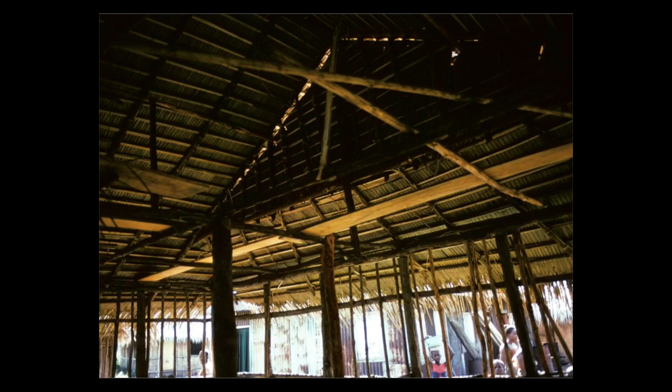This is a completely different example of architecture responding to its environment. This is along the Gold Coast in Ghana. Here you see suddenly we're in the rainforest, and instead of thick mud walls and courtyards, it has now given way to a large roof made out of palm fronds. It's all about cross ventilation, and the society responds with a very open, activities are expressed and exposed to the street, as you can see here.

So there are several points that I want to make about this philosophy that we've developed called multicultural modernism, and I'm trying to show you the roots and the evolution of that philosophy. One of them is celebrating people and place.

Well, this is Thorn Crown Chapel by Fay Jones. It's in Arkansas, fairly close to Fayetteville. I spoke last night in Fayetteville at the School of Architecture, but the day before had the extra treat of getting to see this chapel as well as the Mildred Cooper Chapel that Fay Jones did, also not so far from this chapel. And these are incredibly beautiful expressions that not only are they tectonically honest and delicate and forceful and powerful, but they harmonize into the landscape, they grow up out of the ground, they have a sense of place. And at the same time, there's even a sense of allusion to history.

This is kind of a reverse concept of a Gothic arch. Instead of the flying buttress, all of the supports come from within. So I think that this creating poetry, but within a context and for the people that it's for, is a very important topic. So I want to show you a series of projects that I think support that idea.

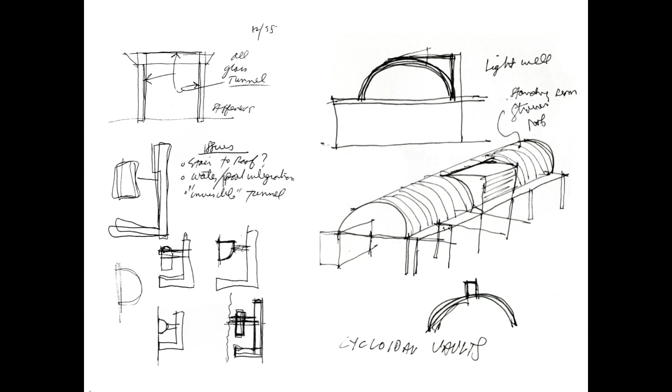And here you see some of the materials. We did cast-in-place concrete, stainless steel. One of the interesting things about Richard Neutra is that he used to design houses that looked as if they were built in steel, but in fact they were built out of wood. So because we had a bigger budget probably than when he started, we were able to do the pavilion in mostly steel with some concrete.

We restored the house. So this is an interesting conversation about preservation as well. It's a form of preservation, but it's really also an adaptive reuse to make the preservation work today for these clients. But you have to also appreciate that had they not bought the lot and expanded their house, there would have been a very large two or three-story McMansion that would have really overwhelmed the original house. So we think it's a form of preservation.

You can also see that we wanted to honor the spirit of Neutra, but yet proclaim our own individuality and creativity 60 years later.

Here's a semicircle - this is a cycloidal arch. So we are responding in section, not unlike what we found in the Neutra house and plan. However, this cycloidal arch is the same arch that Louis Kahn used on the Kimbell Art Museum.

It's an ancient Roman formula, and it's a flattened arch. You can see we more or less just kissed the original house with a glass corridor connecting the two, and that was another way of honoring the house, if you will.

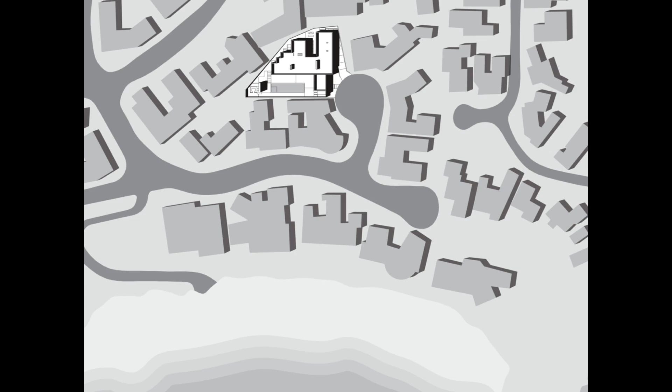One of the ways that we unlocked the potential of the site is that you're able to drive down a ramp, and underneath the main floor are garage, gymnasium, storage, mechanical rooms, sauna, different secondary support. And that freed up the entire ground plane for the house.

Mind you, again, 11-foot height limit, and very much interested in how do we evaporate the barrier between indoors and out, which is part and parcel to the possibilities of living in Southern California.

So if you look here, there's no glass. This is completely open. I'm trying to remember how wide that is - it's about 60 feet. And we have a series of doors that pocket into the wall.

It opens up completely, so the house can transform itself from a cozy house on a cold night to an open-air pavilion on a beautiful day, of which there are many.

There are also some interesting things we're doing with materials. This happens to be Rheinzink, which is a naturally weathering steel - it has zinc in it, so it's not pure steel. Here you see looking in the opposite direction, celebrating the horizontal line, almost as if capturing inspiration from a Japanese landscape.

This is a courtyard that is on the east side of the main living space, the ocean beyond. Because there are coastal breezes, we can actually be outside and block wind with doors that can open and close when one desires to do that.

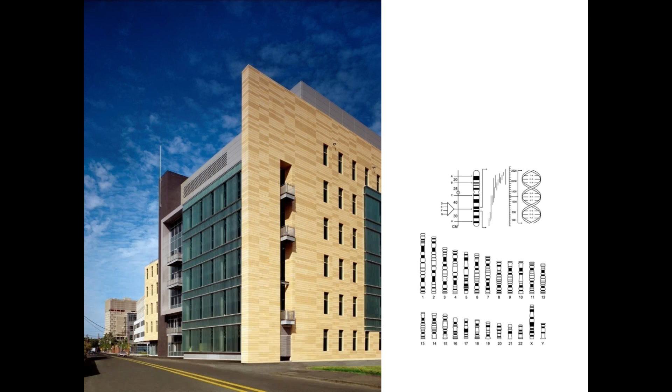We're always interested in understanding how the culture of what's happening within a building can express itself on the exterior skin. So we did our own little study of DNA and found that there are four sequencing gels that compose a DNA molecule. We took four different textures of the same clay, colored terracotta, and composed our own DNA. It's a little bit of an inside story that not everybody knows, but the scientists are aware of it, and it's part and parcel to how this skin design developed.

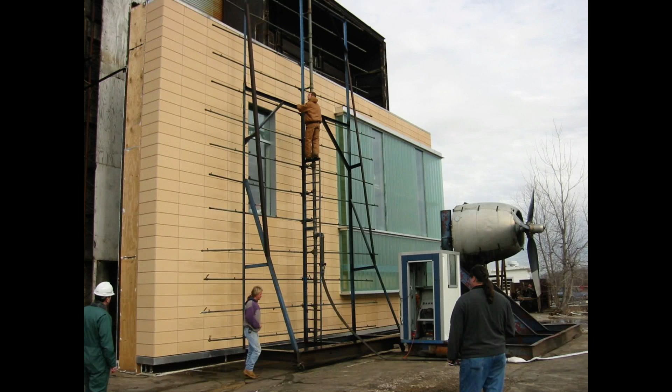This, by the way, is our test. We had in our specs that there had to be a full test. We hired the company Heitmann, a curtain wall consultant, and they have a testing facility outside of St. Louis, not that far from here, actually. They create wind with a DC-3.

And actually the glass kept leaking. So we had to fly to Boston to meet our very irate client because it was a fast-track project and the project was being built at the same time that the channel glass was failing its water test. To make a long story short, we were read the Riot Act. We brought in the German engineers, and they were able to resolve it. It was just a subcontractor installation issue.

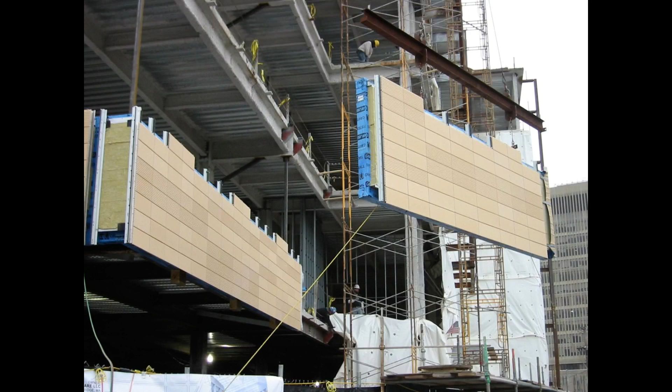But sometimes you just cannot be smart enough to have some of those tests done before all the glass had been put up. That would have been a disaster. So here you see the panelized terracotta system being installed. These are all prefab panels made in the shop and then hoisted up. Here you see it in process, and then we infill the extra terracotta pieces.

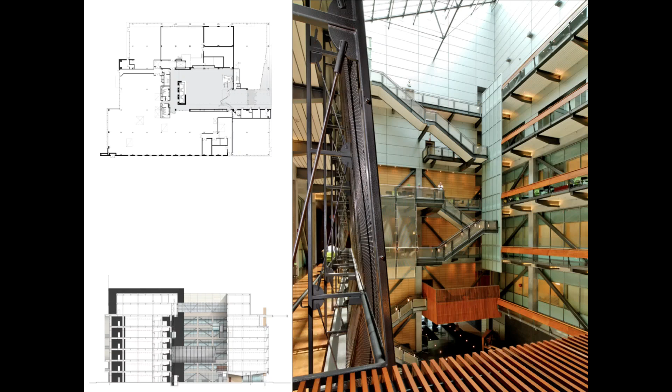Inside, this is a fairly large footprint, so we wanted to bring light through the center of the core of this building with this light-filled skylight. You can see the skylight there, the atrium. One of the things we were very interested in is trying to connect people vertically as well as horizontally, since there are different researchers doing different kinds of things in their laboratories.

So by these large extended platforms, we created what I like to call living rooms in the sky, and we would always put the living rooms in the sky right next to the coffee bar, just within the shell of the atrium. These places become places of gathering and connectivity, and some of the platforms have foosball machines, flexible furniture, so they're quite effective.

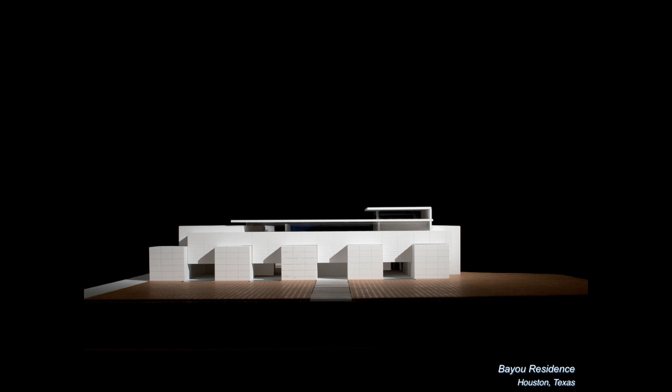This is the Bayou Residence, a house that we designed in Houston, Texas. Unfortunately, it never went to completion because our clients got divorced, so that was sad. That does happen. Sometimes not everything gets built.

But they were art collectors, and they had a significant collection of Donald Judd. I don't know if you know that artist — he's a fantastic artist who had very cubic, beautiful, pure sculptural elements. That in turn influenced the design of this house.

These five cubes were going to be clad in Texas limestone. We made a trip to Marfa, Texas, where Donald Judd has an amazing place called the Chinati Foundation, where you can see some of his large-scale pieces, which greatly influenced the design of this house. You can also see some of the original sketches that emanated and started the design process off.

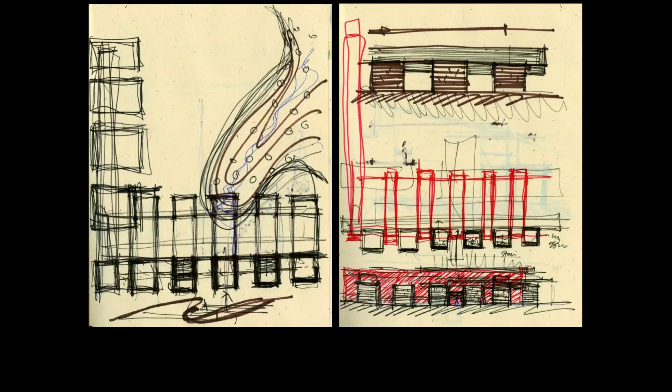I might add that this site cascades downhill to the bayou. You get a sense of it — the bayou would probably be right about there, the water of the bayou. But alas, it never happened.

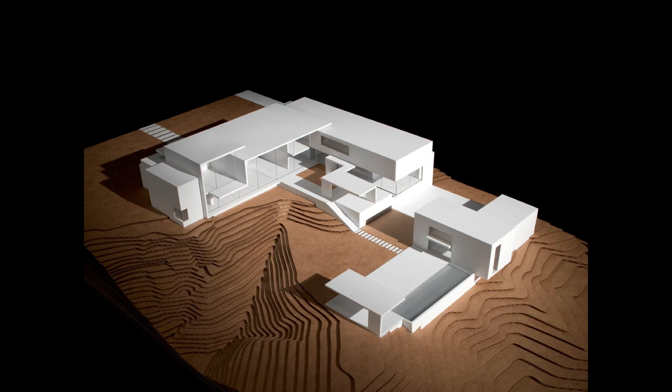My wife and I went over there for dinner, and our friend said, oh by the way, this house, which was completely boarded up and derelict for years, is going on sale for probate tomorrow. And we bought it, because we were afraid some developers would have just knocked it down, since the price we paid was really just the price of the land. But I knew what we had there.

It was a Rudolf Schindler house, an incredibly important architect, and I hope students who come to LA will get to see, if not this house, the original Schindler house on Kings Road. But anyway, getting back to the main point.

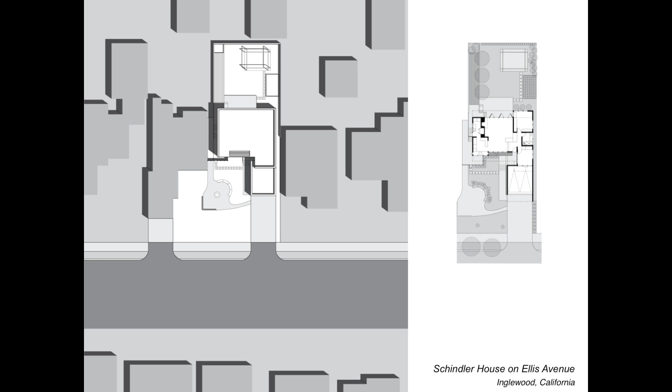One of the things we did was create a communal garden and a communal gathering place for the entire street. Here you see it—this is Callie and Rich's house, my daughter and son-in-law, who bought this house from me. So this is the house that we renovated, and here you get a sense of that communal yard.

We built a communal fence area for recycling and some of the programmatic service items necessary to pull it off. This was our communal endeavor, a communal garden project, in fact. And here you see the rescue mission we undertook.

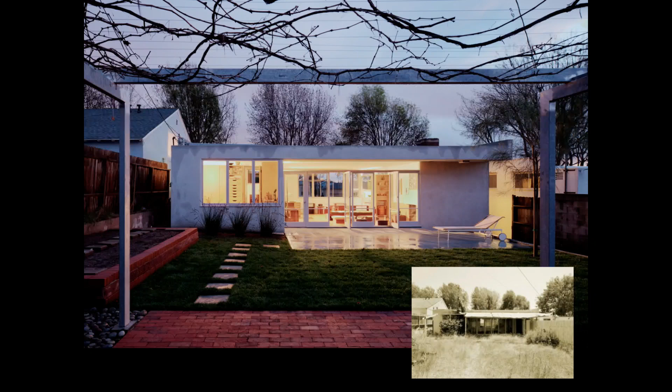This was the original photo. The place was literally falling down, and this is what we were able to restore it to.

One of the really good things was that all the original windows and doors were there. The kitchen was a disaster, the bathroom was a disaster. Since it was for a young family to raise their kid, we felt we should be open to adaptively reusing it, but not changing any of the pure spatial constructs.

So this very modest house, 980 square feet, made me fall in love with Rudolf Schindler all over again, who in 1922 designed his own house on Kings Road. Because I worked on this project so intensely and read several books about Schindler, I believe his 1922 Kings Road house was the big bang of modern architecture, and I'm happy to argue that with anyone who'd like to.

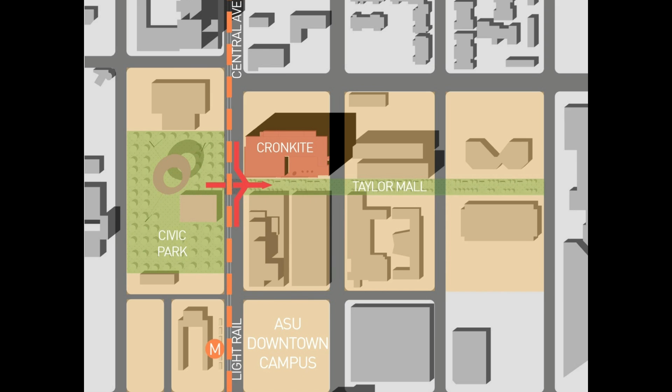We also delivered this project using the design-build methodology, and we were able to deliver it in 22 months from the beginning of programming to occupancy—about as long as it takes to do a bathroom remodel in LA. So we're very proud of that timeline.

It was also done on a very tight budget through the design-build methodology. We wanted to clad this element in Cor-Ten steel, but it wasn't in the budget, so we chose 3 colors of painted steel instead, with the colors coming from the local mountains, and the patterning influenced by the TV and radio spectrum.

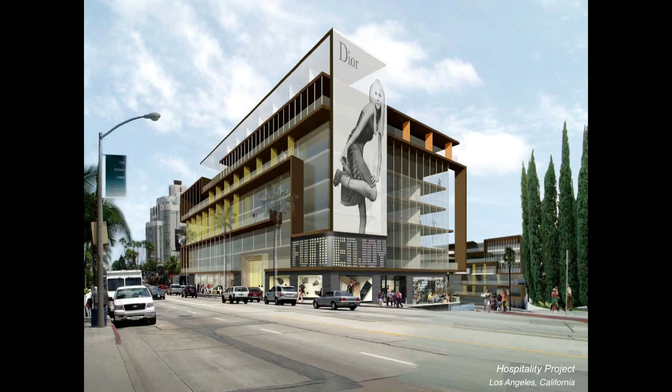This is the hotel, and you're allowed to do digital signage on this strip of Sunset. So this is all a digital sign that also will be, even though the rendering doesn't quite show it, the edge of this banding, this fluid banding, will also be LED lighting and part of the whole signage. And so in a way, we're trying to become part of this very vibrant community.

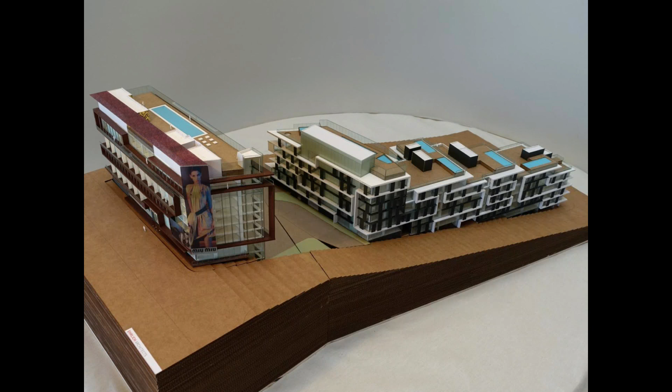And here the hotel, there's, on the scale of the community of the hotel audience, a communal roof terrace. And there will be 40 condominiums in this building, and it's a shared plaza or courtyard that will be a very important hangout place, and we're going to have cafe activity that spills out onto the piazza.

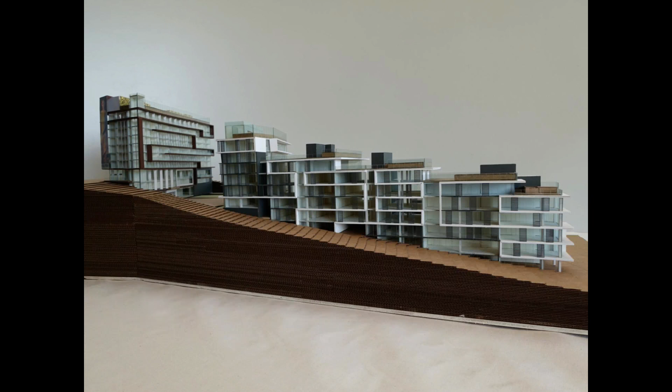And you get a sense of how we're trying to create these communal outdoor terraces. We've also, and this was a city requirement, we talked about this in class today, how because the city requires it, and I think it's a great requirement, that we have to build a certain number of affordable units as well.

So courtyards for living, another topic that is one of the components of multicultural modernism. I go back to Marrakesh. The courtyard on the scale of this city is the Place Jemaa el-Fnaa. And each of these private courtyards are only two stories tall.

So here you see the American dream turned into a nightmare, right? The density of LA is increasing, land is more and more expensive, and everybody still has the dream of plopping down their house in the middle of their piece of land. Well, we're learning now as LA is densifying and as mass transit is coming in, we're realizing that this paradigm just doesn't work.

Every piece of public space is asphalt. You look out your window, five feet away is your neighbor. And then take a look at Marrakesh, Morocco. So why not reverse the field, right? Why stick to these old paradigms of thinking? And let's take suburbia and look at it as a way of creating density with courtyards.

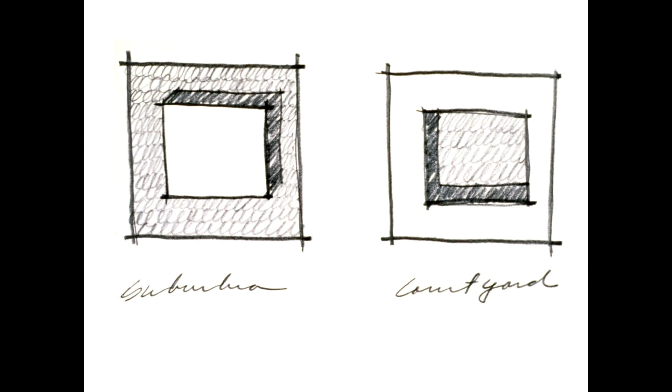Another influence that reinforced this idea was that I spent some time in Japan doing a project in the late 80s, and I noticed that many of their ryokans and important buildings would have courtyards, and also how even within the enclosure, there would be almost like a special meditation spot to a Tokonoma Tansu area.

So creating community is important in the work we're doing, and this is the School of Earth and Space Exploration on the main Tempe campus at Arizona State University.

One of the things also I'm a firm believer in is listening to the land. Well, what does that mean? Well, every sun exposure is different. Western sun is completely different than northern sun.

So this is our north facade. Notice that it's mostly glass. This is our western facade, and we have a double skin protecting the glass. I'm a big believer in clarity.

These channel glass vertical elements are stairs. The shear walls that actually give it the lateral stability are all expressed in concrete. It's a very simple diagram. There's an L-shaped partie of laboratories. In each corner are large shafts and vertical circulation. There's the core of the building, elevators, restrooms, etc.

The mixing bowl, where we really create community, you'll see it in a moment. And then these are offices bringing in north and west light, and there's lots of glass bringing in light from edges all the way through.

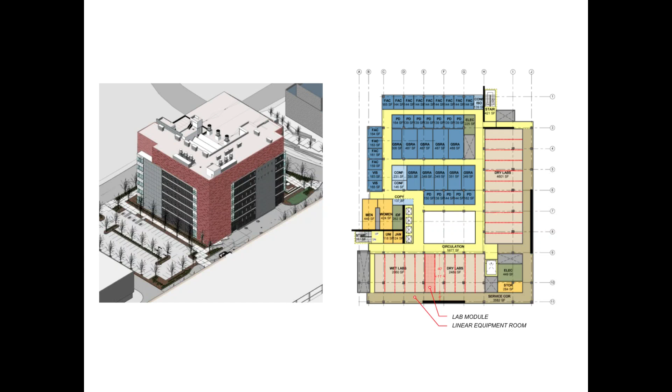This is looking from a laboratory component back from that angle. And so we clad all the vertical shafts in brick, including the penthouse, for the clarity of that. Here you see the shear wall. We did match the same color of brick, but we actually pulled the brick out and created some very interesting patterning.

That was more consistent with some of the design ideas we had. Notice the sunscreen on the west. Here's the north facade. You start to see that clarity of the diagram, shear wall, vertical circulation. That's the entrance, by the way.

And again, the western facade, that brick element at the base is the planetarium. You'll see more about that in a moment. And you walk by the planetarium to enter into the building, and then you're in the main lobby of the building, which the first 2 floors of this structure are actually public, and it's an educational outreach to students of all ages, even including K through 12.

The planetarium, which is behind this wall, is this structure here. And it's very interesting, the technology, because you put on 3D glasses and it's as if you're in a domed auditorium. The technology is marvelous.

So here's the cross-section that is significant for you to just appreciate. The first 2 floors being the public component, and then at the 3rd floor, notice there's a floor over this atrium, and then there's a 5-story skylit atrium, and from this floor up is all privatized research.

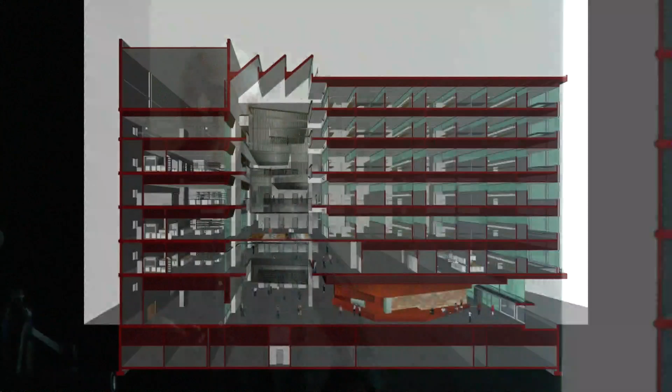They're studying, they have a live feed to the Mars rover. So there's a lot of Earth and space exploration going on. And so here we see the 3rd floor rising up. You see the elevator bank on the far wall.

When you look down, this is our crater carpet. We asked the 5 top scientists to give us a photo of their favorite crater, and we made our crater carpet with their craters and composed this composition, which just becomes fun and people enjoy it.

But importantly, we're taking all the labs and we're opening them up. So the brick, remember the brick that wraps the laboratory component, the L-shaped partie? Well, that wrap continues on the inside of the atrium. This becomes the main gathering place, creating community at the scale of this building and the research that's going on, and then paying special attention to allow the indoor activity of the lab to extend out into the atrium.

And then just some of the details, laser cut stainless steel. This patterning was taken from the United States geological patterns that exist, that are all published and capable of being taken and used.

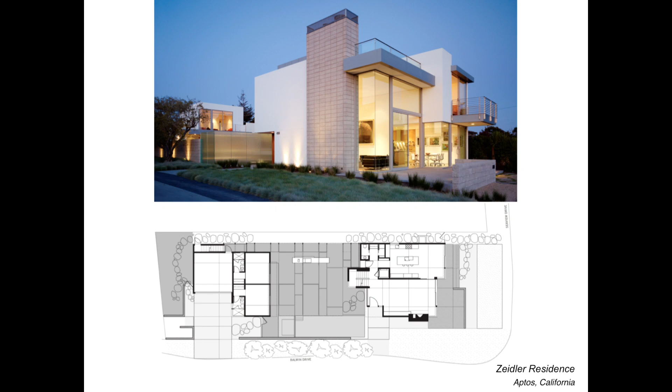Here's a house that expresses courtyards. This house has been pulled apart. There's a courtyard in the middle. And here you see the courtyard from a distance, and that courtyard also has extension of indoor and outdoor space. This is now looking back at the guest house.

This happens to be not in a very dense area, but we are doing some houses in Venice on tight sites, embracing the courtyard concept. You'll see that at the very end. The rooftop—we're generating activity up here by supporting it with a fireplace and an outdoor kitchen.

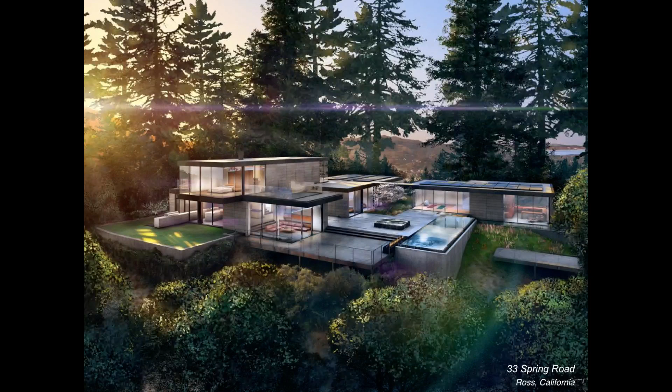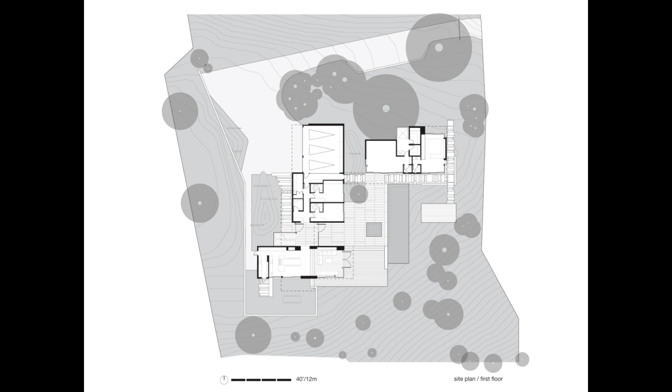This is a house still under construction in Marin County, in the town of Ross. This is a rendering, as you can see, but there's a series of outdoor courtyards that are defined, which you'll get to see, and you can see that more in plan. This is a defined courtyard, but with a beautiful view, which you'll see in a minute. Resonating to the place is important.

So we actually used terracotta—this is terracotta clay, baked clay, big panels 5 feet wide. But notice the resonance with the redwood tree bark—it's a beautiful resonance of color and materiality. Again, it's still under construction. We're doing some detailing where this is the facade. Look at the infinity edge on all sides—there's a tube of water on all four sides.

And a house that we're just beginning now—more than just beginning, we're going to start construction in a couple of months. At first I thought this drawing was really hard to read, but in a way that might be good, because it really shows how indoor space fuses with outdoor space, which is part of the design. So this is enclosed space, courtyard—it's really a series of interlocking courtyards, and the negative space is as important as the positive space, meaning the defined outdoor rooms are just as important as the indoor rooms.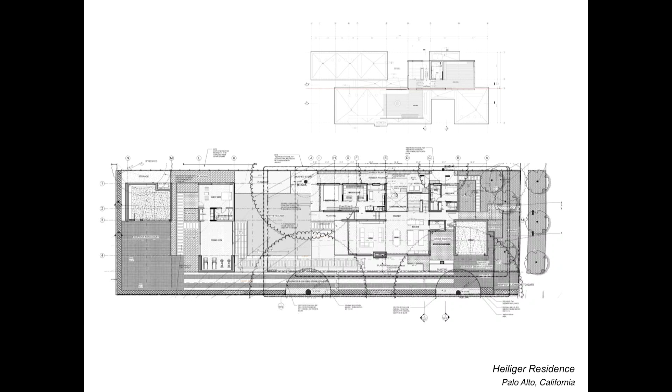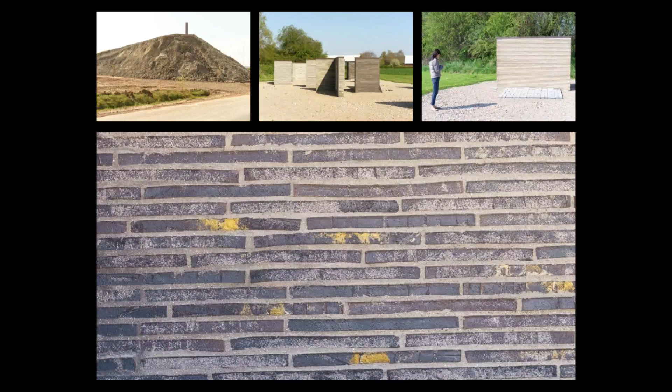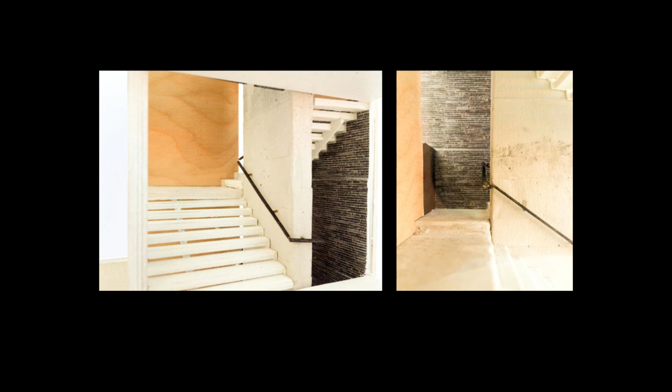This house is a lot about materiality and craft. We're going to use these beautiful handmade and fired brick, and we're going to bring the brick inside in certain areas, with a very minimalist palette. These are just some sketches for the master bathroom.

This is an aerial view of Pomona College, about 50 miles east of Los Angeles. It's a venerable old institution with classical Mediterranean architecture—you can see all the tile roofs of the original campus. We were asked to design two buildings for student housing, this complex and this complex, but notice how, from an aerial point of view, it looks completely different than the red tile roofs.

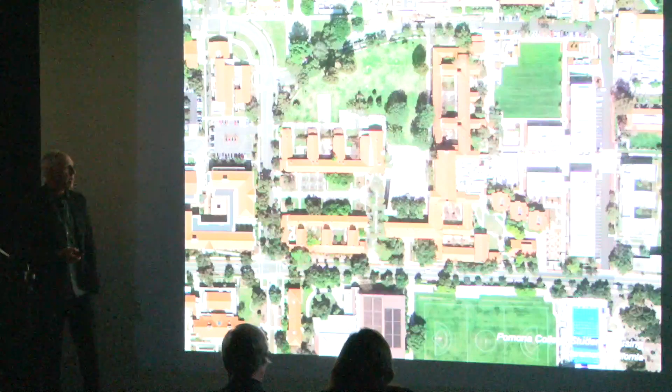It was an interesting conversation because the board of trustees were more conservative and really felt the architecture should be traditional and look like that, yet the students were developing a green agenda—students are ahead of the curve, right? So there was a green agenda being developed in part by student participation, and we were caught in the middle, if you will. We had to make three presentations to the Board of Trustees, and in the end we convinced them this building was more about the future than the past, and we are now harvesting a great deal of energy for solar hot water and electricity for this project.

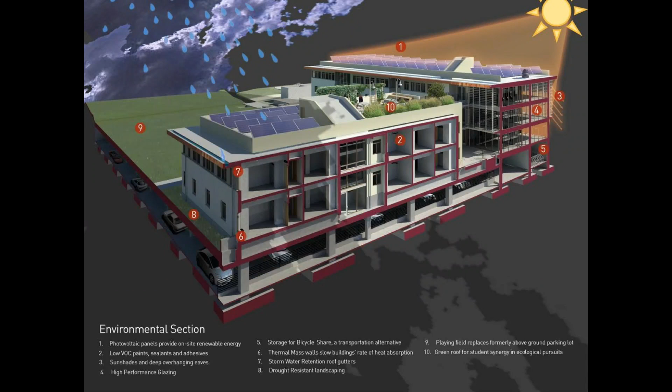However, we did want to still resonate and be respectful of the original architecture. We took terracotta rainscreen for sunscreen, and there was that tie-in. We used precast concrete, insulated precast concrete panels for our walls, which helped with thermal mass. And I didn't mention earlier, it's built over a parking structure, including the field, which is over the parking.

One part of the dorms is only two stories, this one is three stories—notice how we are doing, well, let me use the next photograph. We actually created a new classroom for the college focused on sustainability, and they added that as a new curriculum topic for the school based on this, which has been really exciting. So we added a dashboard with metrics—students can plug their computers in and watch electricity being generated. And again, you see the dialogue of the old and the new.

We were very careful to—there were six bedrooms to a communal suite, and this is one of the bedrooms. All had operable windows and ventilation fans. And even though this is in a very hot climate—because it's only about 50 miles from the ocean—we were able to...

If that group of six students has the air conditioning on and one of them opens a window, it automatically shuts down. But what's really cool is that because the students can all see how much each suite of six is consuming for energy, they compare notes and try to be the most sustainable group of six that they can be—it's kind of great.

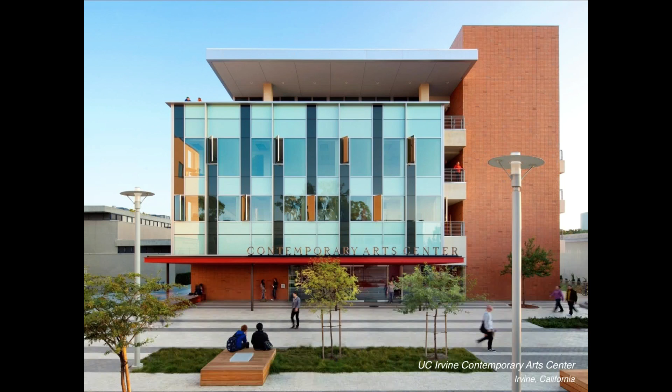This project is at the University of California in Irvine, the Contemporary Arts Center. This project was won in a design-build competition, and it's also an interesting study in sustainability, and let me try to explain.

There are two large spaces, a two-story gallery and a two-story experimental theater. These spaces are highly air-conditioned, with lots of lighting demand, people, etc.

But all of the perimeter spaces surround these two large volumes in the core of the building. This slide shows you how this had to fit very tightly into the existing arts campus.

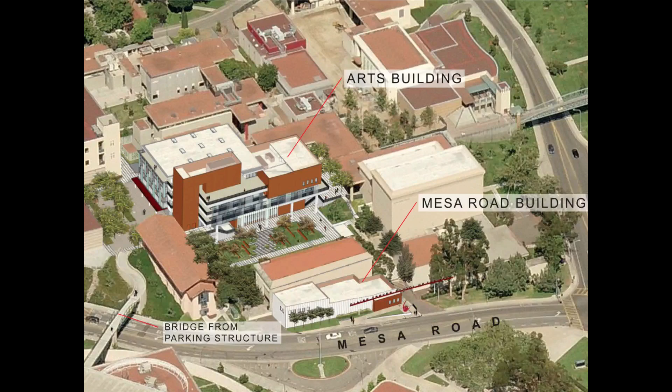Our strategy was that all of the perimeter spaces would be naturally ventilated, and in order to do that, we had to look at each facade quite differently. Here's the western facade, obviously the most complicated and challenging from a solar point of view. So we have these metal fins blocking the sun from the west.

We create a corridor, and then these spaces have windows that can open. So you might ask, well, how does that work? We have a series of ducts that allow the breeze to come in and be ventilated through the roof, so every room does have natural ventilation surrounding the perimeter of these two large volumes. We specifically did not put air conditioning in all the perimeter spaces.

We did a little education along the way, where faculty and students are made aware that on certain really hot days, they will not have a 72-degree room, they'll have probably a 76-degree room, but it doesn't happen that often, and we're taking advantage of the coastal breezes.

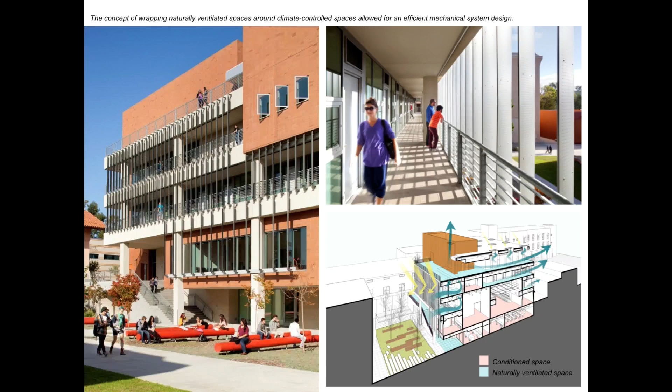We used old telephone poles stained orange for our telephone pole courtyard, if you will, a great gathering place - another example of sensible sustainability, if you will.

This was another design-build competition for the GSA, the General Services Administration. It's a United States federal courthouse in Yuma, Arizona.

This canopy was a great offering to the community, and it's because it's very close to downtown. You go over this set of bridges, and there's a wonderful series of walls and benches that people can sit on, and it has become a great gathering place.

People sit there because they're protected from the sun, and this canopy has photovoltaic panels producing 21% of the building's electricity. There are a lot of security demands of a building type like this, too much to go into, other than to say we have to actually protect the building from car bombs or truck bombs.

So all of these walls, which just look like friendly landscape walls, are in fact also part of the security. We really spent a lot of time and energy trying to integrate those very demanding, basically programmed requirements.

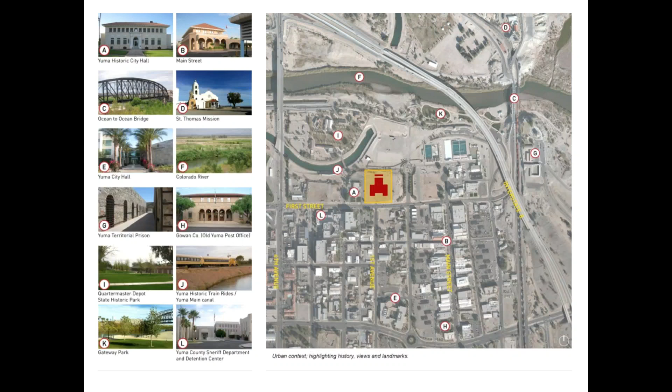So we looked at the Supreme Court in Washington, D.C., and how that heroic, very important historic building influenced our modest little structure, which is now a reinterpretation of a classic courthouse, but using materials of the native Arizona desert, the sandstone and rusted steel.

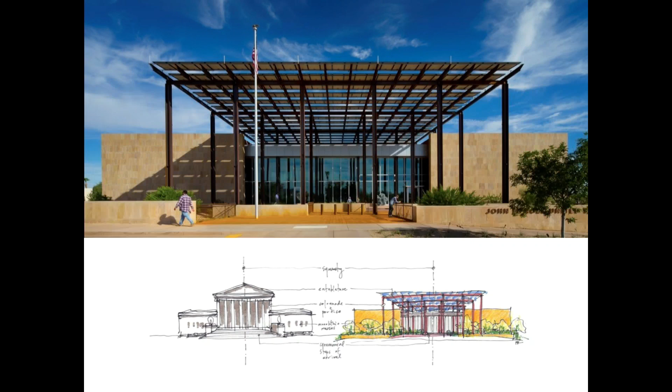The east and west facades - we have this rusted steel mesh, and we're growing grapevines up it. This photo was taken about a year ago; the vines have grown almost all the way to the top. That was our very modest way of protecting the windows on the east and the west from this very intensive sun.

From our historical research, we did look at verandas and porches and looked at how you modulate the sun in an intense desert environment. We also, influenced by the bridges, created our own bridge and our own little arroyo, and here you see that shaded area in action, and people do hang out.

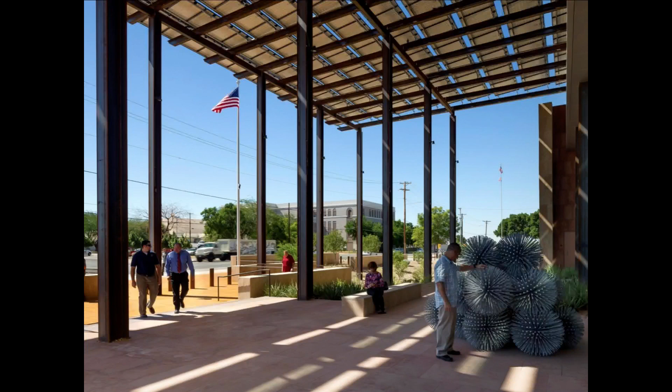Inside is a two-story lobby. The courtrooms themselves, there are two courtrooms on the top floor, and there's a lot of program. There's marshal's offices, and there's actually a jail inside this building. It's a very complicated program, too complicated to get into, but it was a big effort to resolve all the issues in a very simple, clear way and make it able to be built on budget. One of the things we did is bring in beautiful north light into the courtroom, which humanized the whole environment.

The last topic, part and parcel to multicultural modernism, is think global and be local. I was driving along in southern Nigeria when I was living there years ago, and I saw this amazing house. I stopped, and out pops this guy dressed like his house. I got really excited and started to chat with him, and he told me he worked for an Italian contractor in Brazil for many years and then came home to build his dream house.

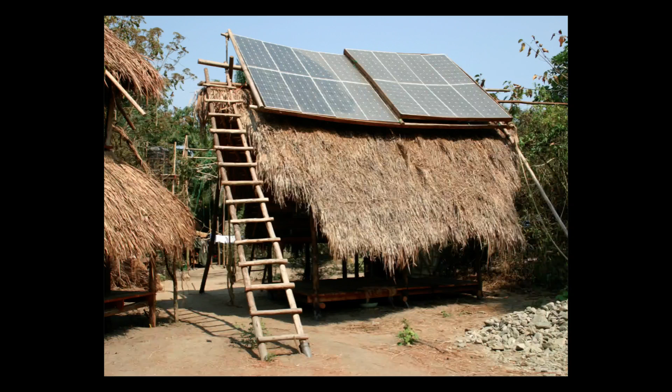So he brought all of these inputs together, and he built his Brazilian fanciful facade element and his Italian balustrade and his Nigerian laterite exuberant stone detailing, and voila, here you have his own multicultural concoction in architecture. Here's another example where along the shores of Lake Tanganyika, in this little fishing village, they just skipped the Industrial Revolution and went right directly to the 21st century.

Going back now a long ways, to when I was living and teaching in Nigeria, I had the opportunity to design a very small experimental theater. And I do want to say one thing, that every project I've shown so far, and even after this, were truly the work of collaboration of various people in our studio.

Architecture is a very collaborative art. This is the only project that basically I did as a single person, and this was before I really opened up our practice in Southern California. So anyway, this was an experiment. It was definitely built out of local materials.

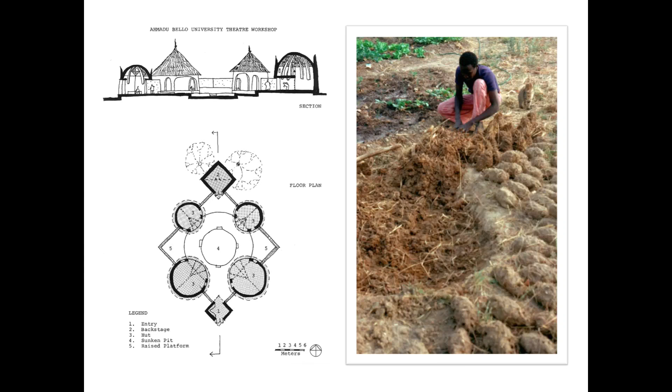Here they are building sun-dried bricks that form the walls built from this plan. It's kind of an indoor-outdoor experimental theater, you'll see that in a moment. One of the things that was quite interesting was that this campus was built out of steel, glass, and concrete, and really did have many issues with heat. We built this rather subversive and very inexpensive structure about just 300 yards from campus.

But notice how the arrangement of audience to performer can change. All the furniture is flexible. So it's really the students who took over and in fact defined the space. This was the first time I became interested in integrating art into architecture.

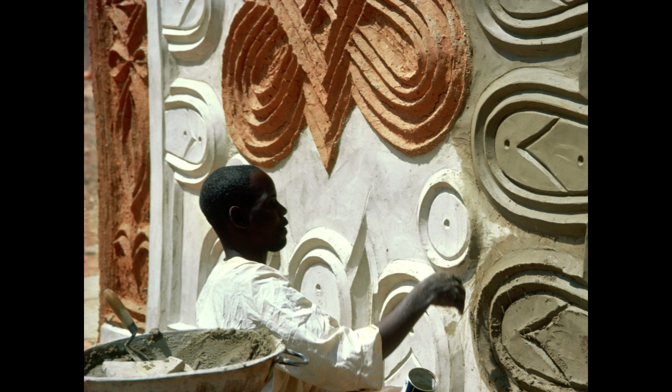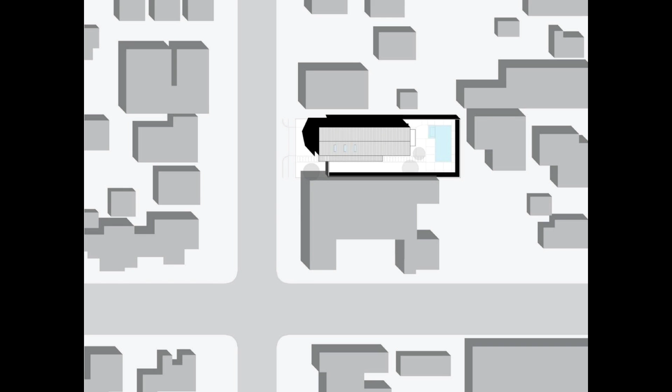As I had a love of these crude industrial sheds in Africa, I found a kindred spirit in Los Angeles, an African art dealer who wanted us to design his house. He also had a similar love of those industrial African sheds, and this is now his house, his family's house, all built out of corrugated Corten steel, nestled into basically an infill lot in Los Angeles. Every surface, roof, wall, skin is very inexpensive corrugated Corten steel. Glass doors open up, and you can see his art collection.

And here they are. This is Ernie and Diane. Ernie always wears camouflage, and Diane always wears some form of fake animal print. I think that proves it—here you see the hunter and the hunted.

We've had the opportunity to do work overseas where we have to respond to a culture. We had the opportunity a while ago, over 10 years ago, we were commissioned—this, by the way, is the Burj Khalifa by SOM, the tallest building in the world as of the moment—our client wanted us to do a rather large house in Dubai.

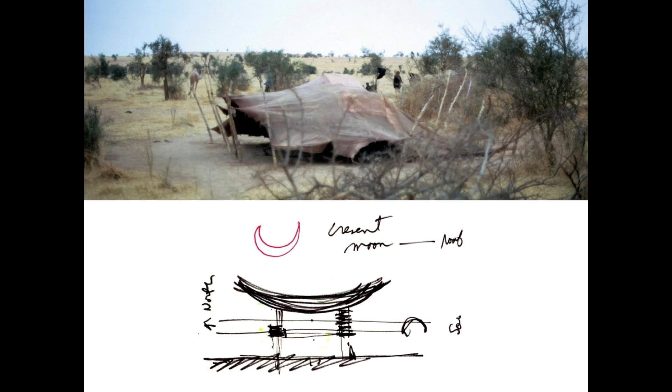I really do believe that one needs to be not only local but global simultaneously, and there is a dance between those two territories. Literally the Bedouin tradition still exists in the outskirts of the city. The crescent moon is an important symbol, so you start to see the embryo of the idea for the house. In the desert, we dug deep wells and created our own oases.

This roof is an aluminum-clad concrete structure held up on 14 stone-clad concrete columns, also hearkening back to perhaps some of the heroic early modern architecture of Le Corbusier, Oscar Niemeyer perhaps. In plan, there's a very complex series of arrangements.

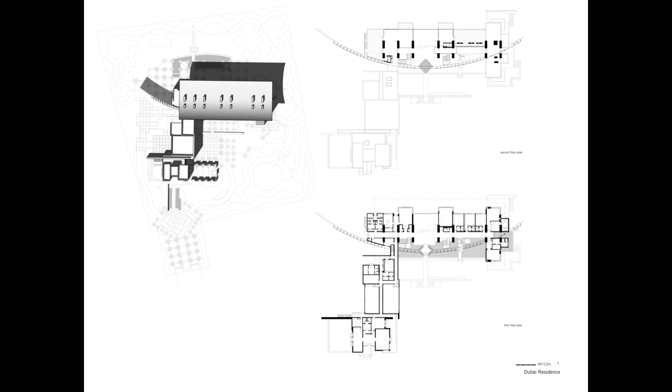But in plan, you can also see the crescent, and this is basically a veil of steel, or actually steel and aluminum—you'll see it in a moment—that separates private from public, because this is a very important individual who has large receptions, etc. Here you see that veil. That veil in Arabic is called the mashrabiya. It's a sunscreen on the south facade.

I'd like to tell you that this sunscreen does block the southern sun, and it does, and that large roof does create a large swath of shade. But from a pure sustainable point of view, there is no way to justify this house. But was I going to turn down the commission? No, I wasn't.

Taking water from outdoors to indoors, creating an evaporative cooling.

Let me just go back. I want to point out one detail for the students. Notice these columns, notice how they do not touch the ceiling. These columns are cantilevered out of their foundation in the ground, and they hold up the mashrabiya, or the sunscreen. And that is to have the clarity of this large roof that is supported only on the stone columns.

So there's a clear diagram, and the power of the floating roof is not diluted by these columns had they touched.

I just went to Crystal Bridges, and when you go there, there's this very elaborate, quite beautiful curved glulam beams held up on a suspension cable, and yet the architect chose to have these very big, fat diagonals holding up the glass, and it dilutes the clarity of the structural diagram.

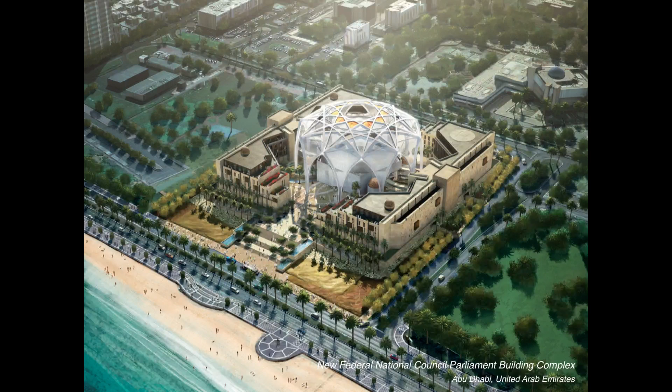We decided that a dome was important, but this dome is actually a sunshade device. So it's shading all of the important spaces in the House of Parliament, and all the parliamentary members and all the support spaces are flanking on east and west.

Notice that the east and west walls are very blank because there's also an intense sun.

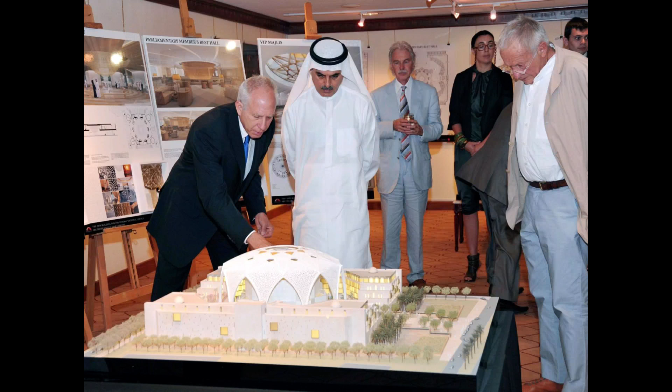This is us presenting. On the jury was Sir Richard Rogers, important members of the House of Parliament. This was our local architect who was going to carry out our vision to execute it.

Importantly, we were really looking at culture and tradition and trying to reinterpret. So we looked at the national five-pointed flower, rotated it, and it became the starting point for our dome. And the flanking buildings were more rooted in the vernacular and the colors of the earth and the local sandstones.

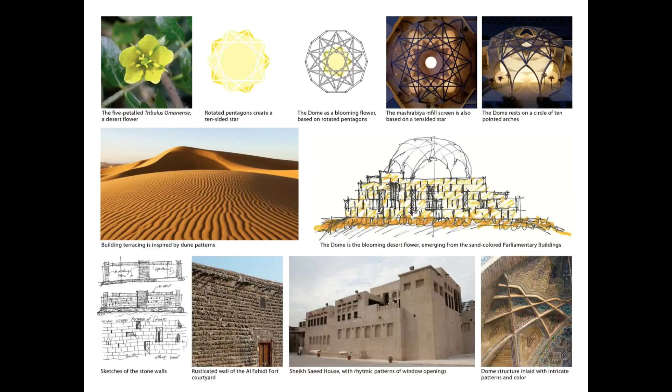Here you get a sense of that grandeur, and the dome completely reinterpreted as now a shade structure.

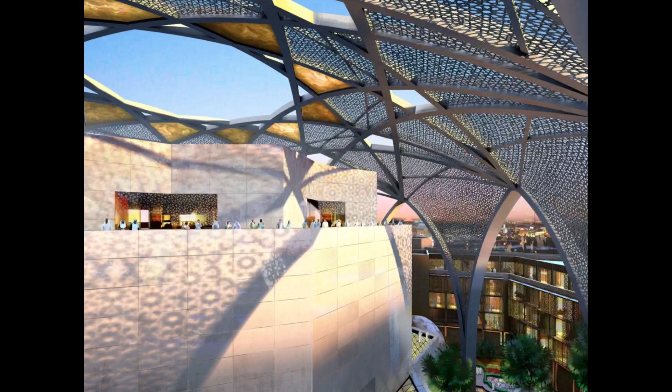But there's another thing. This culture is also very interested in carved pattern and decoration, and we looked at the casting of light and shade and shadow. So here you have these patterns that are not carved in stone, but ever so slowly moving across the face of the white marble.

So it's a reinterpretation, and we were invited to be in the final four, and I'm happy to say we prevailed. We were selected even over two Pritzker Prize winning firms, and that was a real thrill.

It's been 3 years since we won, and the country seems to be on hold about building this building. I think they're busy buying military aircraft rather than houses of parliament. But it still could happen, and we are told that it will.

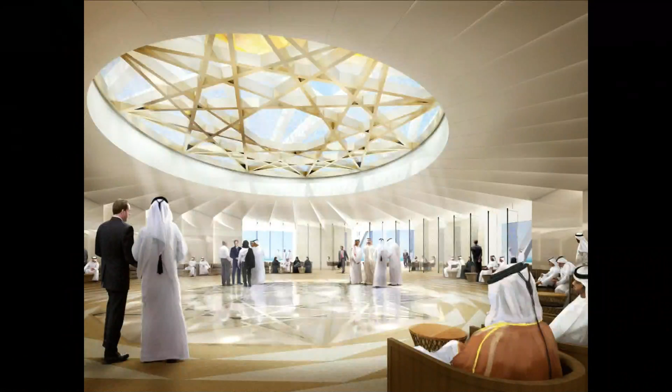Just some of the areas of assembly, the main chamber, the House of Parliament itself.

We even explored electrical light fixture details, these 5-pointed pentagons rotated, kind of exploring just patterning and light.

Okay, the last project. I always wanted to build a solar home, and this is my 7th grade science fair project. Actually, I got to build a solar home in the town of Venice, California.

This is the throbbing boardwalk in Venice on a summer day. We live about maybe a half a mile, three-quarters of a mile from this throbbing energy. Thank God we're far enough away because this is too busy for me. But it's part of it. It's a real walking community.

I think some people have this notion that Los Angeles is only a car city connected by people in little capsules of metal known as cars. But quite frankly, there's a great emphasis now on walking communities that are being developed. We have a light rail system that is getting enhanced all the time, and it's quite a vibrant city in many, many ways.

But this is my and our family's solar home. This is the main house. We did tear down a very little bungalow that was there, so it's an urban infill. This is our guest house floating over a garage. The two trees, actually three beautiful trees, a palm tree and two Aleppo pines, were here first, so we built the house around the trees.

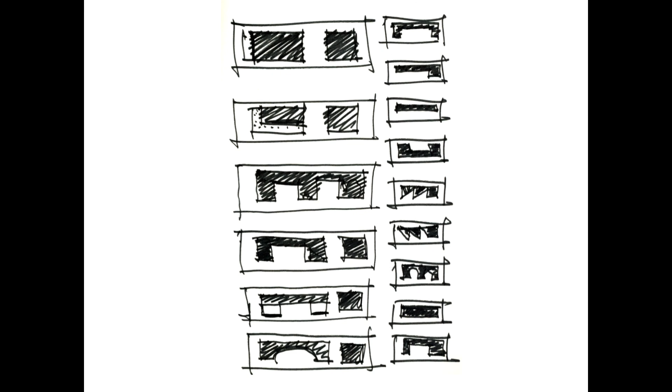You can see that this is kind of a summary of what I've been talking about. Here it sits on a corner. We did not want to drive far away. We wanted to be part of a walking and bicycle community, which this is.

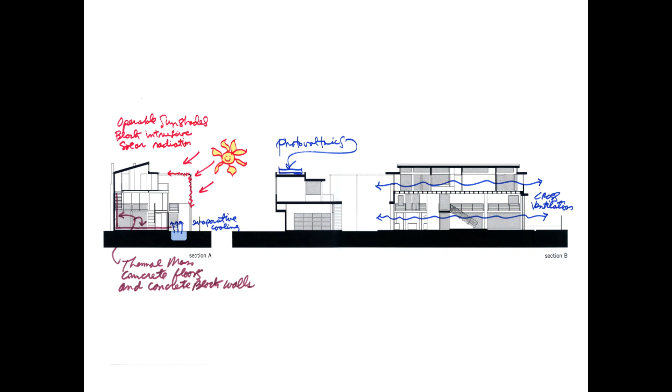And a simple diagram. Two things I want to point out. We do generate some of our own electricity with photovoltaics, but we have a very interesting shade structure that helps create our microenvironment. So on automatic buttons, we can control up and down. You can see influence from my days spent in Marrakesh in terms of color.

And there's an extra magical thing. I talked to the students a little bit today about how not only does architecture need to resolve the pragmatic, respond to the site, respond to the people, but how about poetry and magic? These are all good things to have as part of architecture as well.